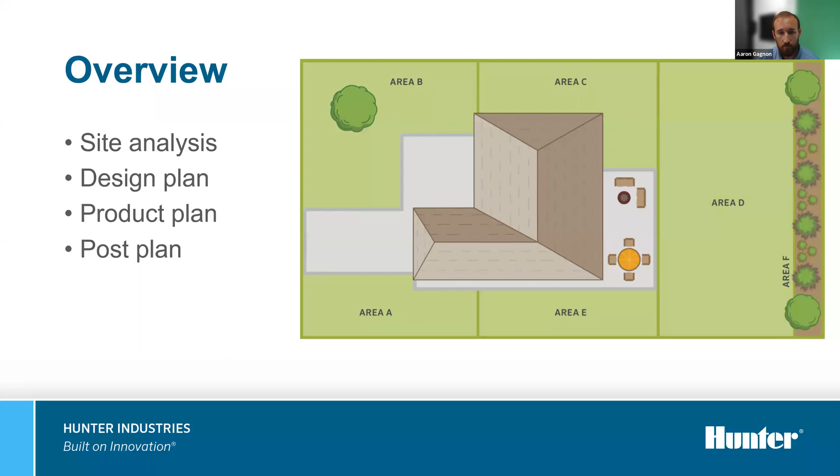When Mrs. Smith was doing some gardening one day, she noticed something peculiar about one of her shrub zones that's on a slope. She noticed a lot of wasted water and realized her sprinklers were more or less irrigating the air than the plants.

Mrs. Smith did what she knew best and called an expert. She called her contractor and asked if they could come to see the site and examine what could be causing this. They got to the site and realized she was right. She does have a problem. She needed a little bit of retrofit work done with some maintenance on her system.

Now, what Mrs. Smith's contractor does next depends on what they know as an expert. After all, not everyone is a black belt, so this can vary. A Band-Aid solution won't fix the problem completely, but an endgame solution will. This is why it always amazed me how two contractors can look at a single problem and produce two different solutions with either a new installation or maintenance fix.

Contractor A, for example, is cheaper up front, produces Band-Aid fixes, installs what they know works, doesn't pay attention to the landscape design like the irrigation system or plant material, and they are more expensive in the long run because the irrigation system requires more maintenance. It's not an efficient system. After all, what do you expect if you had your boss's daughter install your irrigation system?

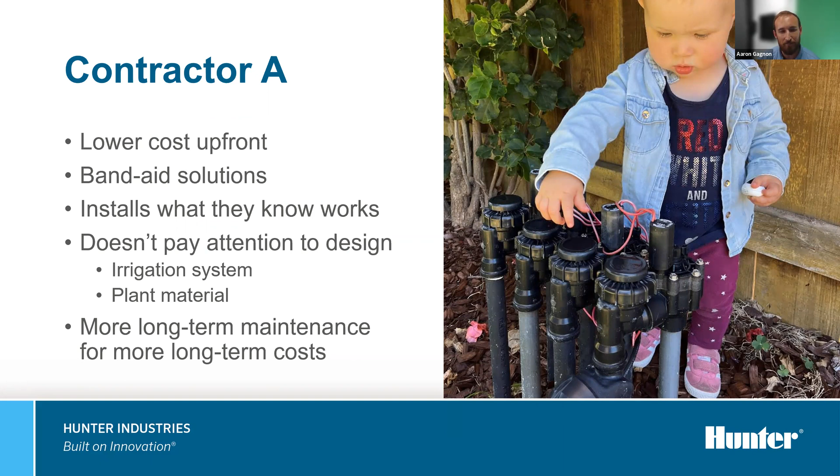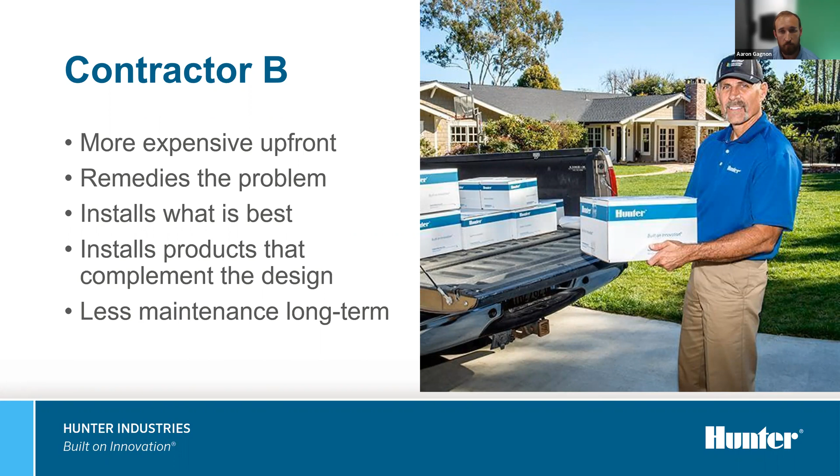Contractor B, on the other hand, is more expensive up front, but they remedy the problem because they install what is best. They install products around the design and are cheaper in the long run because the irrigation system requires less maintenance. This is a black belt's approach to fixing the problem for Mrs. Smith. She chose a more professional solution.

This plan maximizes the efficiency of her irrigation system. In this situation, her contractor helped with all of her runoff and wasteful water by installing multi-stream rotary nozzles, pressure-regulated spray bodies, and programmed cycle and soak for the slope zone. This offers Mrs. Smith an endgame solution with less maintenance at the site. Additionally, her contractor made a larger profit by installing premium products with no added effort.

But what do you do to create an endgame solution? And how do you get there? I'm sure you are all asking yourselves, will it be better for me, my workers, and my clients? To explain these important questions, let's begin with our first point from the summary, site analysis.

Before you can present any solution to your customer, it's important to perform a site analysis so you understand what is happening at the site. Makes sense, right? This gives you helpful information when performing the later points like creating the design and choosing the products for the irrigation system.

And before we get into the information for the site analysis, it's important to have the right tools. An important tool to assist with performing the site analysis is an audit kit. These allow you to perform audits for the irrigation system and receive empirical data and understanding how efficient the system is, what products are being used, and how they are being used.

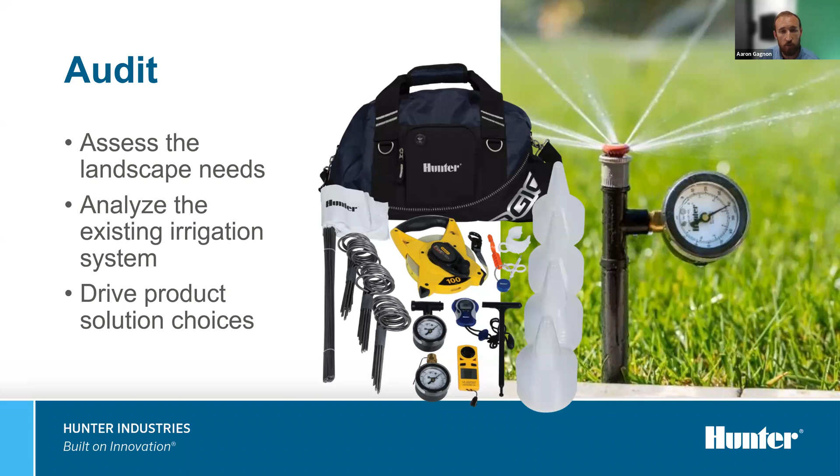Now that you have your audit kit, let's begin with the first item for site analysis, the water supply. Knowing what a customer has for their water supply is crucial for an efficient system. Are they using city water or are they using well water is just scratching the surface. Knowing the capacity of the water supply, like the total GPM and dynamic pressure, is even better. It helps determine how many valves they will need and how many sprinklers they could potentially put on a valve.

A great point to discuss with your client in relation to the water supply is if customers are using well water and if they will need services for maintaining or installing filtration systems for their water supply.

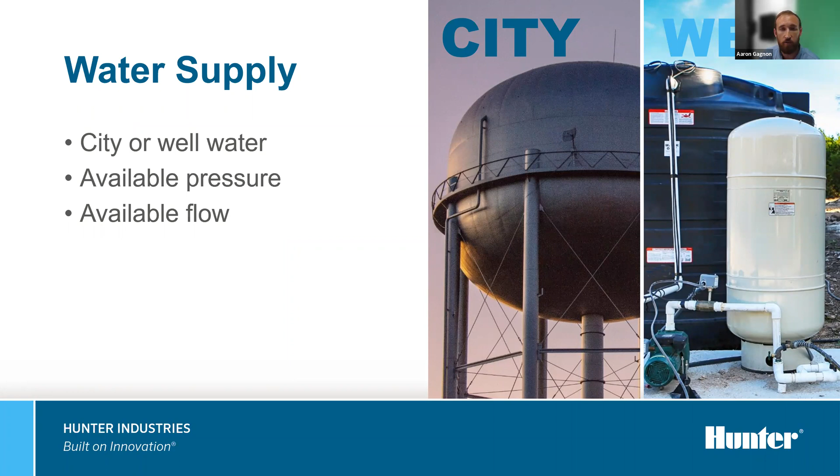Another item to discuss in water supply is usage conflicts. These could be related to specific watering days that are mandated. Having an irrigation system that can be efficient to keep the plant material alive is crucial if water restrictions are in effect in your area.

Even if there aren't restrictions, try to time your irrigation when it's best. For example, pay attention to when it's windier in the day and avoid irrigating during that time. Also avoid times when water is being used in other parts of the property, such as when the dishwasher is running or someone might use the shower, which will consume some of your water supply.

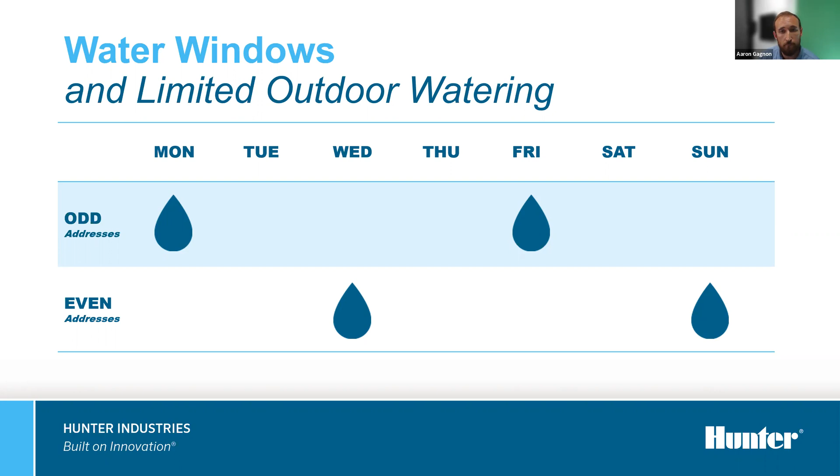Next for your site analysis is plant material. What is Mrs. Smith irrigating? Is it grass, shrubs, or trees? All of these should be irrigated differently. And if these are all paired up with one valve, this presents a great opportunity to offer Mrs. Smith an option for a better solution to her irrigation needs.

Another part of plant material, but kind of on its own, is focal plants. In this situation, Mrs. Smith has a weeping spruce. This item is a priority for her, which offers an opportunity for extra business and to help with her needs. The opportunity will be for an installation of a new valve to isolate this plant's needs and to use premium low volume products to irrigate the focal plant.

Next for our site analysis is how much sunlight and shade the areas of the landscape get. If one valve controls an area where half gets full sunlight and the other half is fully shaded, it presents another opportunity for your business to install a new valve, because Mrs. Smith's landscape is suffering from being overwatered and underwatered, all because of sunlight and shade.

Next for our site analysis is determining what soil the customer has. What soil they have determines how long it will take for the water to be absorbed into the soil, and also how it will absorb. For example, sandy soil percolates water more vertically, while clay is more horizontal. The infiltration rate is different as well - sandy soils flush water through the soil profile much faster than other soil types.

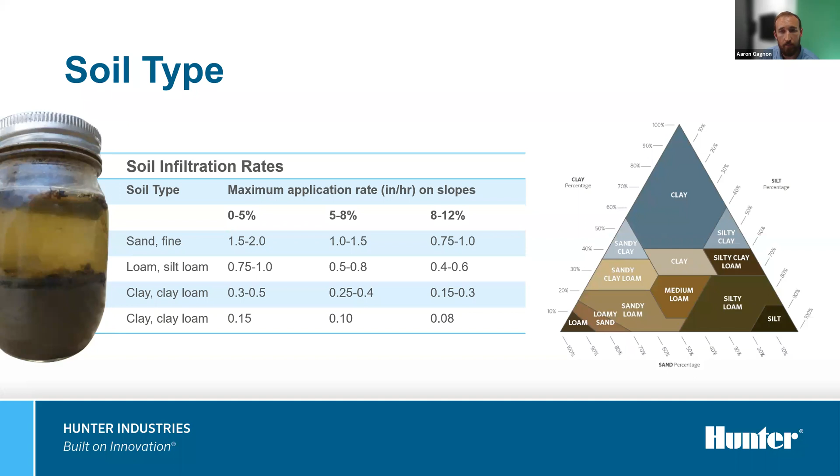After soil, it's important also to consider the geography of the land. Does Mrs. Smith have flat areas to irrigate? No, turns out she doesn't. That changes her end game solution because now we must consider runoff on the slope.

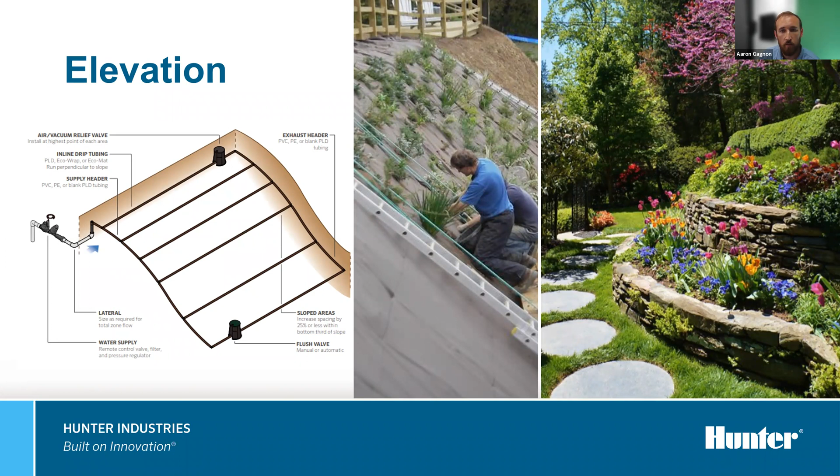The last thing to consider in your site analysis is any other limitations that are not known. These are site-specific landscape qualities that only the customer could know or are difficult to know. Is there anything being missed that the owner is aware of that you aren't? Ask questions - ask Mrs. Smith if something is being missed in the landscape that you should be aware of. Perhaps city sewage lines run through her property. That changes the landscape because in some cities you can't landscape over sewage lines.

After a site analysis is performed, so you understand the landscape elements of the site, planning a design is next. The design plan is an important step to show your customer what the landscape will look like in terms of irrigated areas. You specify all your irrigation zones and how they will be irrigated. It details where things can be improved and where money can be invested to improve the efficiency of the landscape through the irrigation system. If more valves are required in the plan, this will cost more money for the client.

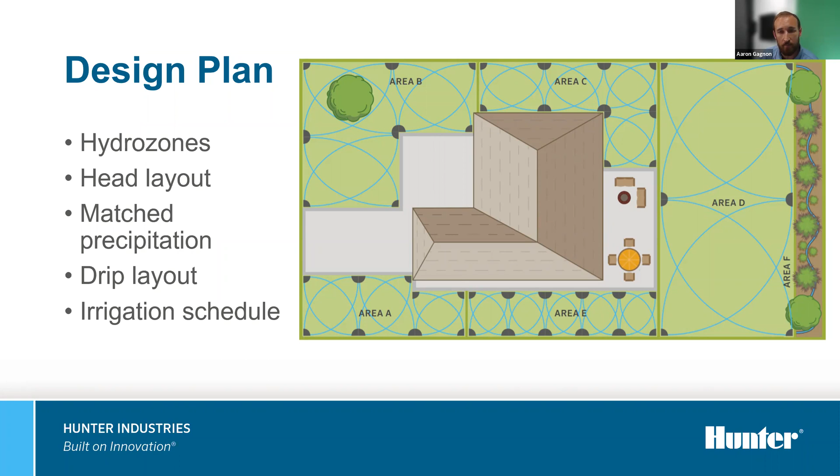To help sell the larger quoted job to a customer, describe to them the challenges they will experience if they don't use an endgame solution to solve their problems. Provide them with the Band-Aid fix and what that looks like. Tell them about the issues they will have if they don't go with the endgame solution. For example: well, Mrs. Smith, if we do not go with this endgame solution, you will end up spending more money in the long run because the Band-Aid plan requires more maintenance. The design plan should also discuss Hydrozones, what they are and why you need them.

This is where the site analysis information will come into play and be very helpful. Let's use an example again. Say Mrs. Smith has 3 valves on her site and is irrigating 7 areas. She's fighting a battle where areas are too wet and too dry and plant material is suffering. She needs 7 valves for the 7 areas to have an efficient system. This is an opportunity to provide her with an efficient system and for you to make a profit with an endgame solution.

First, describe to her why the problem is occurring, and next, the reason for splitting them up. You describe to her hydrozones. The reason why you need to split them up, Mrs. Smith, is that these areas have specific site qualities that make them have different needs. The specific site qualities are plant types, plant water requirements, soil types, sunlight and shade, elevation, and the size of the area. Currently, all 3 valves irrigating the 7 areas have different qualities in a hydrozone, and that is why the plant material is suffering.

For example, for your first valve, half of the area gets full sunlight, and the second half gets full shade. These halves should be separated. If we add more valves to accommodate your hydrozones, the plant material won't suffer, you won't be wasting as much water, and you'll have a much more efficient system with a thriving landscape. Hydrozones give great benefits to having a controlled irrigation system with this added flexibility of additional valves.

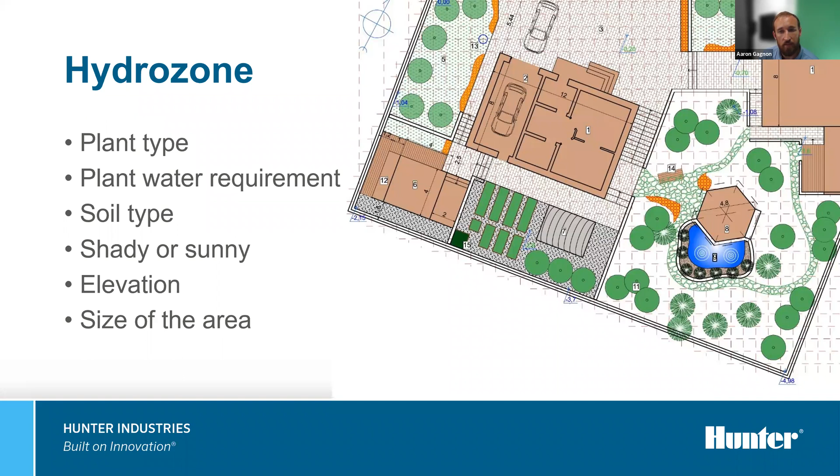Once she agrees, you can then show her in more detail the head spacing for the sprinkler layout. Head spacing is another important part of the design plan to show the customer where issues are located in the irrigation system and how they can be remedied.

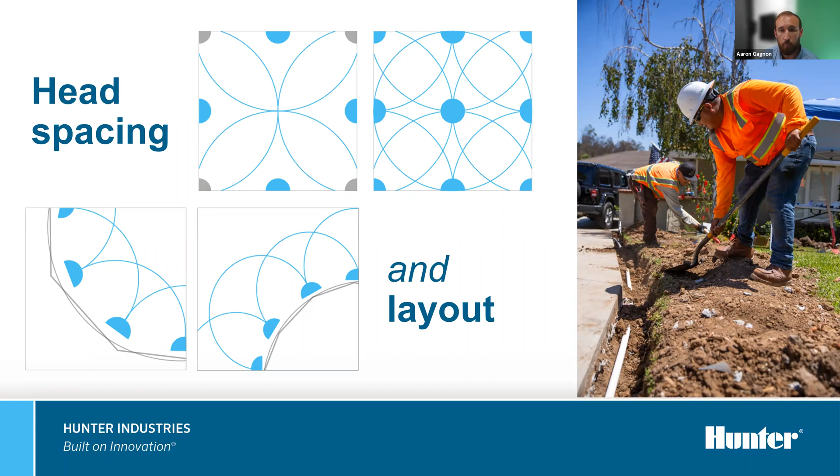For example, part of Mrs. Smith's problem was with the grass zone. In one area, the heads were not spaced evenly, causing over and under watering. Show her that you need to evenly space out the sprinklers to get proper coverage. Adding a different nozzle may not always cure the problem. Installing the heads in proper locations is part of the endgame solution to fix her problem.

The next point to consider is matched precipitation for your design plan. The precipitation rate is the water that is being used in the soil profile. The issue seen in the field is that sprinklers with different precipitation rates are installed with the same valve. Understanding that the water being used in the soil is different from nozzle to nozzle is an important factor in the design.

This is why rotors don't play nicely if the arcs are different on one valve, or if spray nozzles are paired with rotors on one valve. We'll go into more detail about sprinkler choice in the next section, but it's important to understand from a hydraulic point the role that precipitation rates play. It can mean no longer having the hideous muddy soil in your front yard, leading instead to a more aesthetically pleasing landscape.

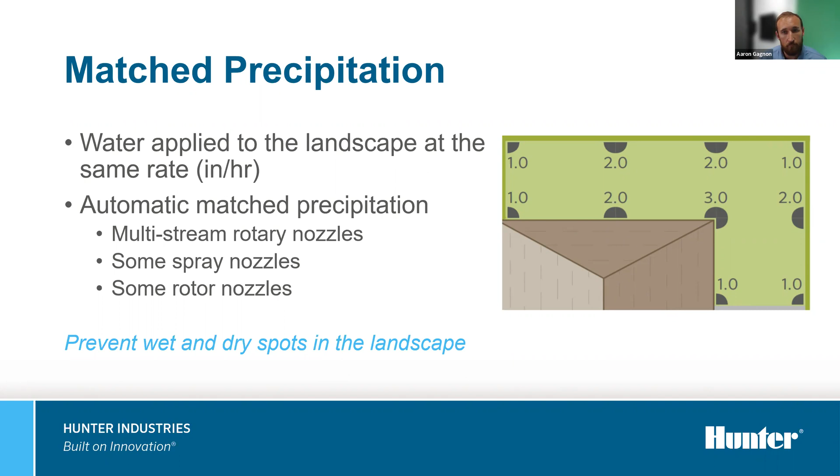Another thing to consider in the design plan is the drip layout. Just like head spacing, knowing where the drip tubing is laid out is important for low volume irrigating. That being said, low volume areas should not be tied to high volume valves. Mrs. Smith once again has an issue with one of the areas because her shrubs are being irrigated by her grass sprinklers.

Those should be on different valves because they have different watering requirements - they are different hydrozones. Describing to Mrs. Smith that installing drip tubing laterally in her garden bed is a much better way to irrigate is a great endgame solution. It provides her with an efficient irrigation system for the shrub's health and allows you to make more profit because you are installing more at the site.

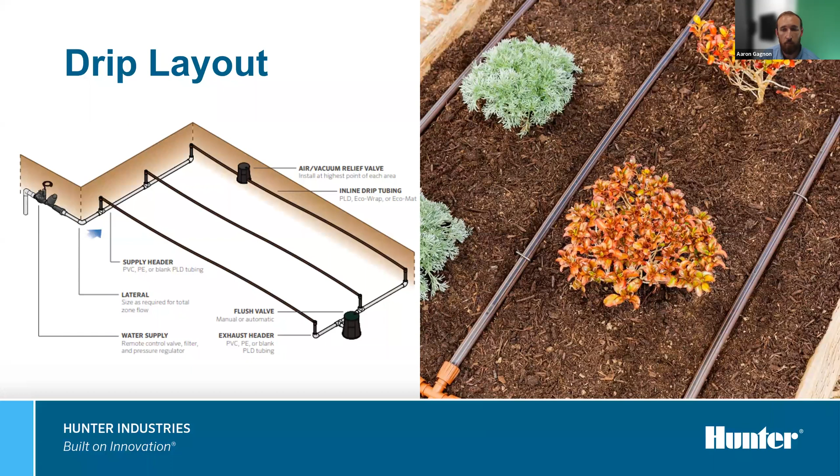The last thing to consider in the design plan is the irrigation schedule. In our story with Mrs. Smith, the cause of the initial call was to help her with wasted water on the slope. Programming a cycle and soak schedule into her controller will help with runoff from occurring in her situation. It gives more time for the water to absorb into the soil profile by reducing the irrigation cycle periods and waiting in between cycles of watering.

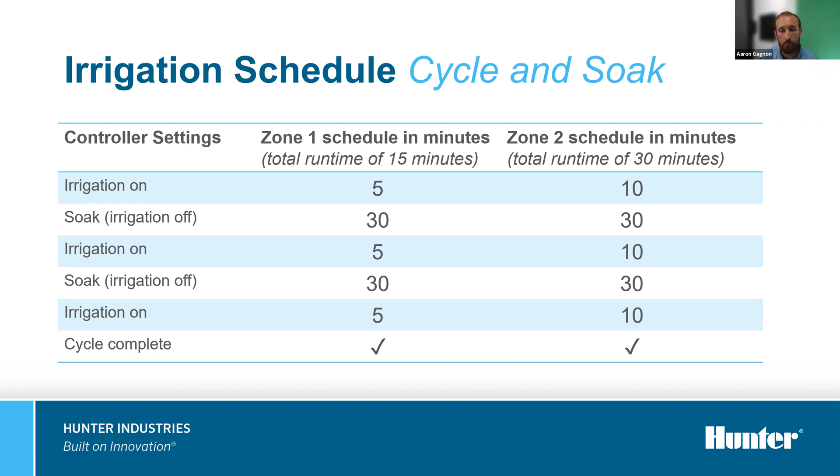After the design plan is finished and the customer understands the rough design for the irrigation system, they will probably want to know at some point what products they will be using. That is when the product plan comes in.

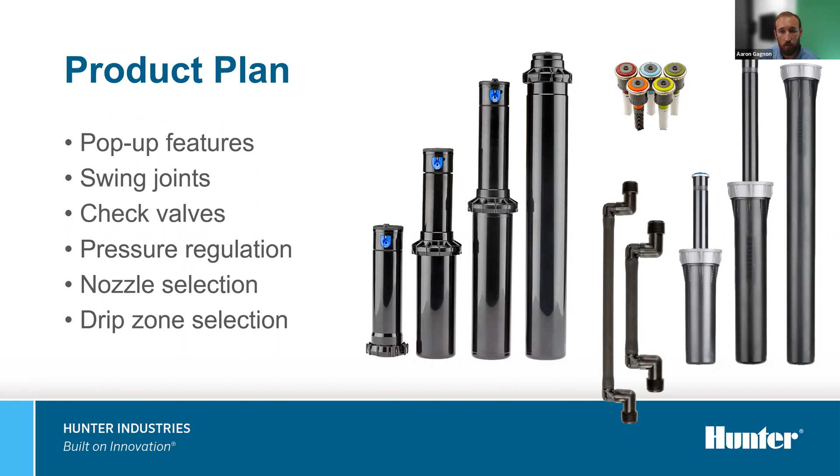The product plan provides a solution to answer why people will use higher end products for an efficient irrigation system. It goes beyond hydrozone areas and gets into detail about providing endgame solutions to specific landscape problems. Not everyone will need to split up areas with valves; others will need better products installed for that endgame solution. This allows the contractor to increase profit by marking up costs, and in many applications it does not require more labor than the Band-Aid fix products.

There are many pop-up height options to consider. The simple way to avoid this is to install sprinklers with a higher pop-up height. Choosing a taller riser allows you to irrigate more efficiently by clearing the plant material.

Let's say you have chosen the right height, but your head is sunken down or crooked. Now you correct it. The most efficient way to do this is to install a head with a swing joint. If you don't have a swing joint, raising the head or straightening the sprinkler becomes more painful. Also, the swing joint helps prevent damage to the sprinkler if it were to get run over.

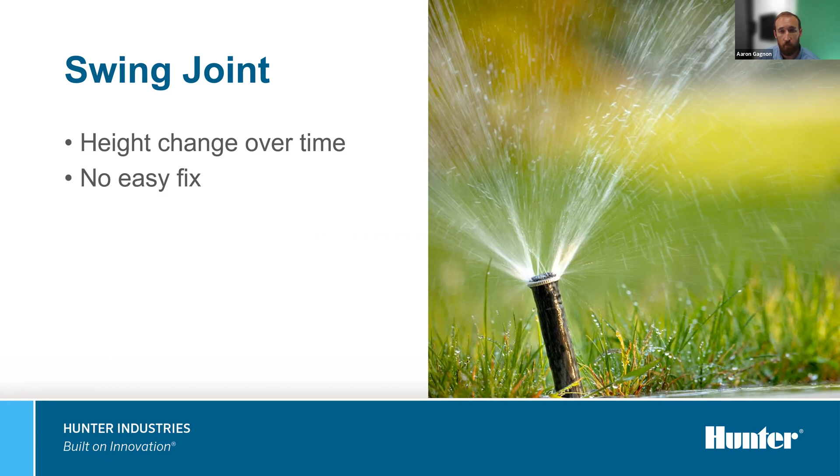If it does need to be raised up, you can dig around the head, lift it up, and straighten it, which is a lot less painful. If you don't have one, you could install riser nipples, but they do not protect the rotor from being run over like a swing joint does - that's a Band-Aid fix. If you're doing a complete install, it's very important to consider installing swing joints for future maintenance calls.

Another option is to use flexible tubing with spiral barb elbows to create your own swing joints. This helps save the installer money in the long run from potential callbacks and needing to repair sprinklers when they are broken, and makes it easier to raise if it is sunken.

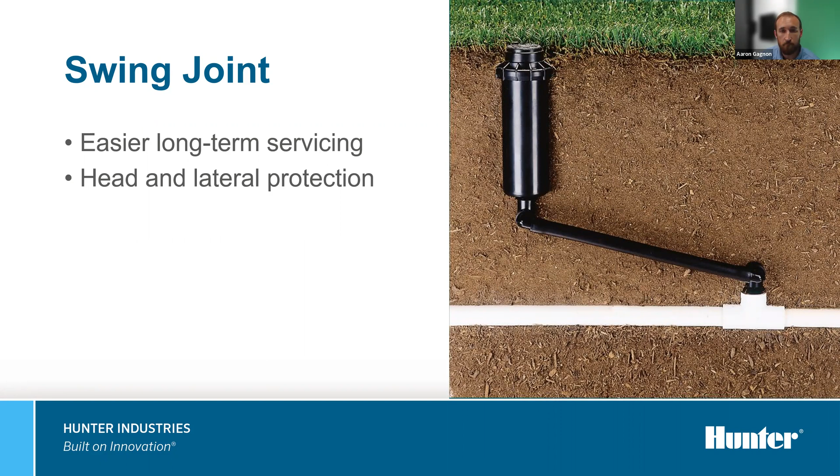Next up with rotors is using a stainless steel riser. This is a great upgrade with a higher end product for applications with large machinery. In installs where large mowers or tractors are used on residential sites, it's best to upgrade to the stainless steel pop-up. They are more rigid and durable and can withstand more wear and tear from these conditions.

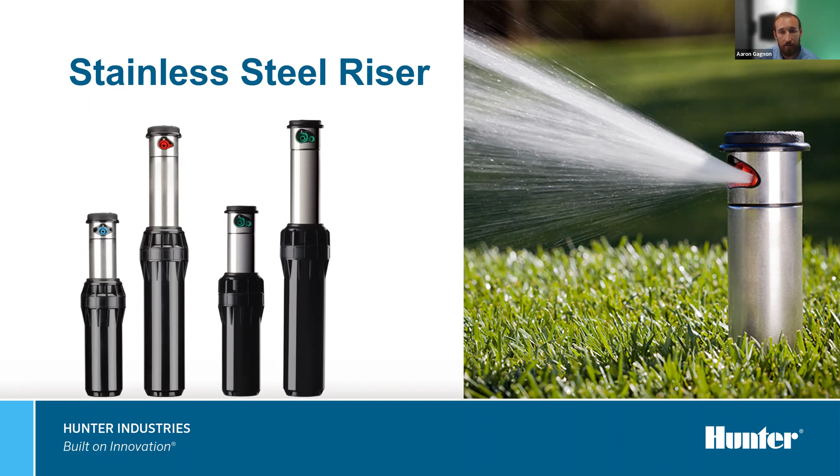Additionally, these were created for harsh soil conditions and help prevent the riser from being scarred by debris. Stainless steel risers are just more reliable to pop up. It can mean avoiding having to go back and install new risers by installing stainless steel in the first place.

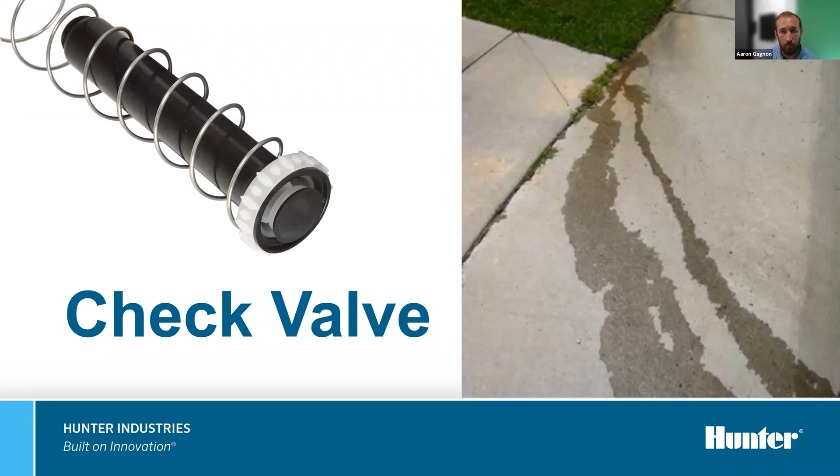Another great product to consider when planning for an efficient irrigation system is check valves. A check valve's purpose is to not allow water to come out of the sprinkler after the valve shuts off. These are used primarily in low elevated spots in the landscape, where residual water in the pipe gravitates to the low spot and comes out of the sprinkler. This can all be avoided with a check valve.

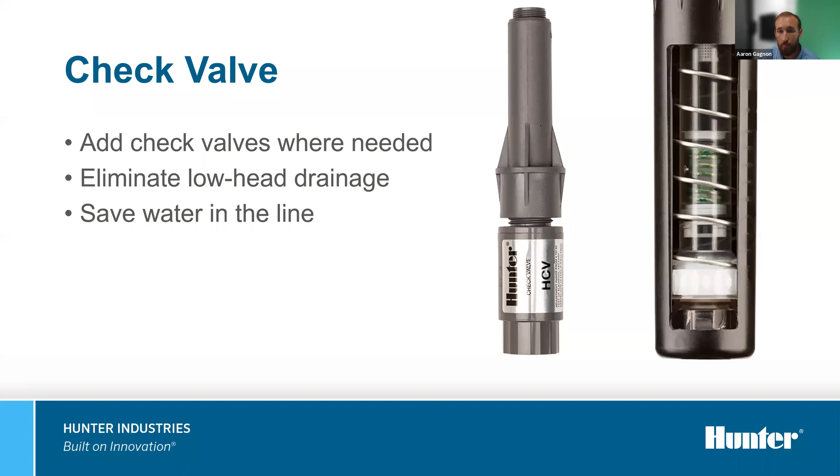What's great about check valves now is that they come as factory installed options, so you don't have to thread a check valve onto the bottom of the sprinkler anymore - there can be one installed in the sprinkler to begin with. Another great option is that instead of keeping inventory of non-check valve products, you can simply keep check valve products in inventory to increase the space on your shelves. Check valves provide a great solution to a problem that doesn't cost you any more time and labor, and can help make you more money with this upsell.

Next are pressure regulating sprinklers. Regulating pressure at the sprinkler head allows each nozzle to see the same optimal pressure for balanced performance, higher uniformity, minimal misting, and lower flow rates. When switching to pressure regulated spray bodies, you can have the potential of saving up to 30% in water savings. This is all from using the same size sprinkler, but using a pressure regulated form of it.

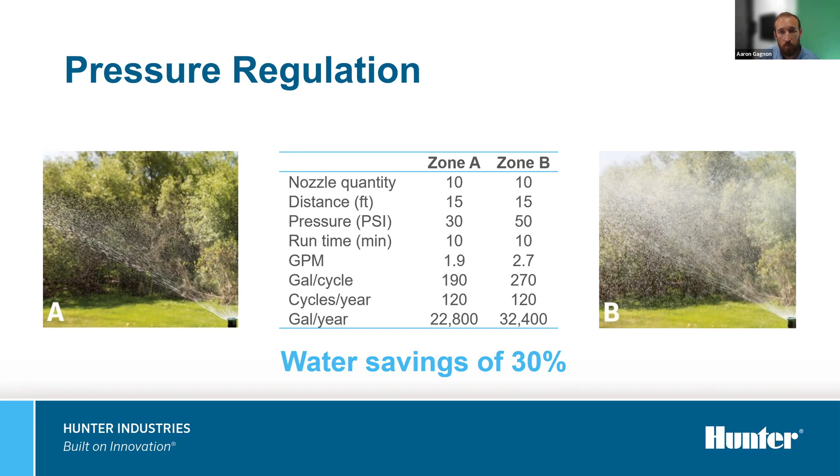Before the client may say no to this, it is also important to mention that it may be mandated in your area. Many states have started this. For a full list of the states requiring this, visit the Appliance Standards Awareness Project website. The ASAP estimates that if every state adopted the WaterSense specification for lawn sprinklers as a standard by 2025, the US would save 141 billion gallons of water annually.

Pressure regulated sprinklers are a fantastic way to save water and create a more efficient system while using the same amount of labor time and increasing your profits.

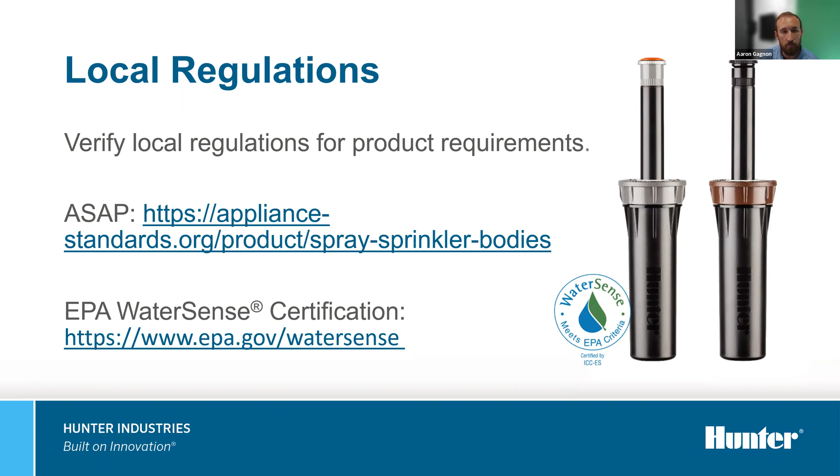Selecting which nozzle to use is very important during the product planning process as well. Many are designed for specific plants, soil types, and site needs. Choosing the correct one means getting the last part of the sprinkler to deliver the efficiency of the system for your client's landscape.

Let's consider rotor nozzles first. Under normal conditions, standard nozzles for rotors are a terrific choice for most applications. They can cover areas larger than spray or multi-stream rotary nozzles, and provide an amazing way to save cost on labor for installation by minimizing the number of heads for the large area.

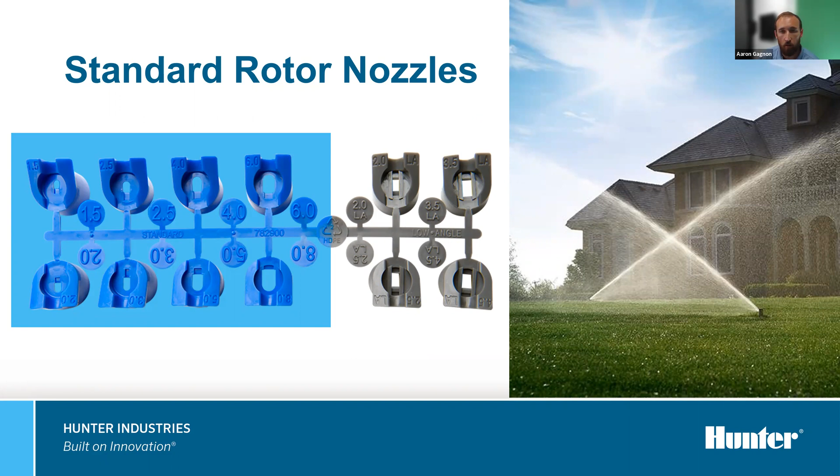On the other hand, if a residential site requires to be irrigated with rotors on slopes, low-angle nozzles are a great solution. These offer a great choice for delivering water to sloped landscapes.

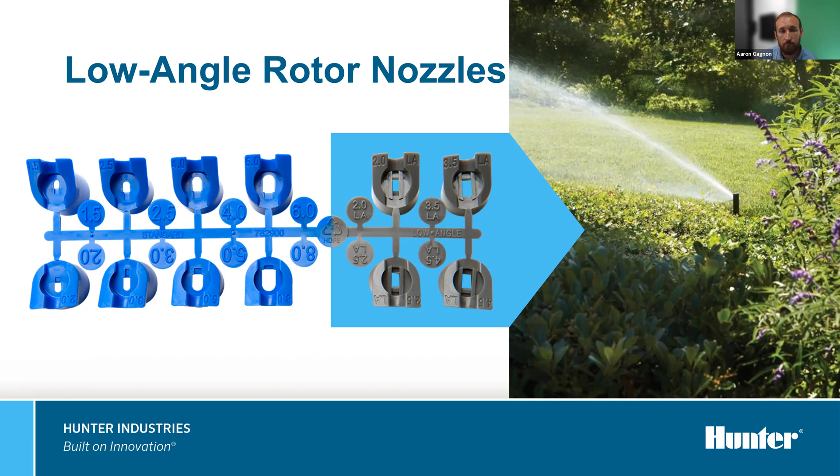Next, we have spray nozzles. These are a great choice for applications with a pressure of around 30 psi. When at that pressure, they can deliver large droplets and do an outstanding job at applying water to the landscape.

If you want to upsell, though, from spray nozzles, the multi-stream rotary nozzles would be a great choice. This premium product delivers water most efficiently with its lower precipitation rate, which eliminates runoff, has a high distribution uniformity, and has a larger water droplet size. The multiple streams allow the water to be delivered more uniformly and have a matched precipitation. Installers can choose different radius options from spray distances to short rotor distances, all in the same valve. This gives them great flexibility when installing.

And not to mention, Mrs. Smith loves having her grandchildren over. And one of the things they love to do together is sit back in the morning and watch the pretty streams of water flowing through the landscape.

Next, we have short radius nozzles. Short radius nozzles qualify as microsprays for pop-ups since they flow under 30 gallons an hour at 30 psi across the family of nozzles. This probably only affects those regions pushing microproducts in small spaces, but these are really great low flow spray nozzles for small areas and planters.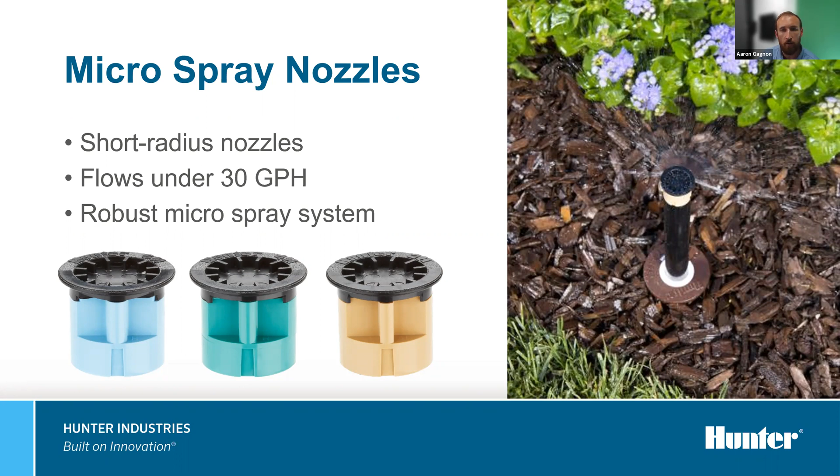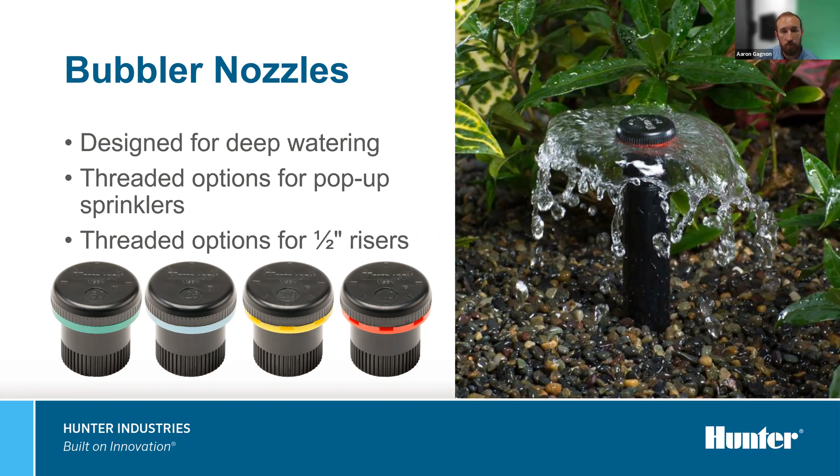The last item to cover in product planning is drip zone valves. Product planning for these items presents great opportunities for increasing profitability and efficiency. When planning for micro irrigation systems, it's important to have appropriate filtration and pressure. Drip zone valves have filtration and pressure regulation in one for the convenience of installation. Whenever a low volume of water is needed on site, consider using drip zone valves to upsell from a normal valve.

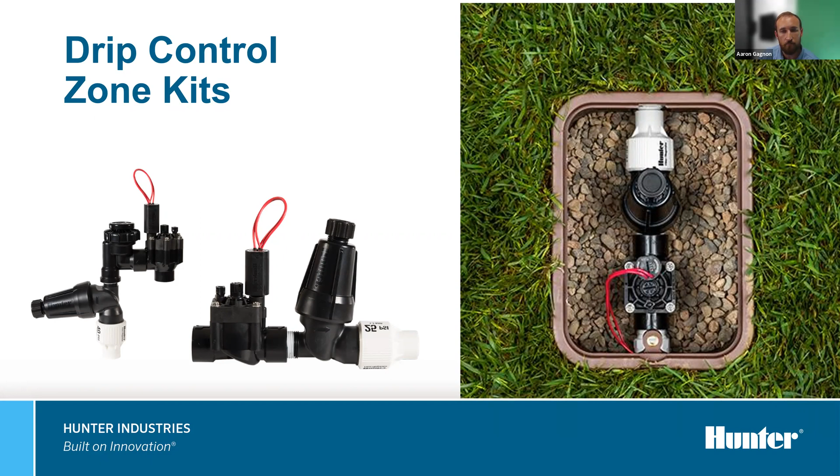After the plans are implemented and the renovation or maintenance project is finished, what else can be done? Mrs. Smith, I'm sure, loved having you as a dependable contractor, but I am sure she would appreciate your business long-term. Your post-plan contributes to that.

The first thing to consider in post-planning is advertisements. Installers can't keep a sign in someone's yard for the entire time they are renovating the landscape or performing maintenance. They can put company stickers on their irrigation controller, which provides a great way for homeowners to contact installers.

It can be a cumbersome process at times to keep track of paperwork and contact details for installations and renovations. A company sticker on a controller is a much easier way to know who installed the system and how to get a hold of the installer. What's great also is that in many applications, when a homeowner needs to talk to the contractor, they need to be on site, and that is exactly where the sticker is.

The homeowner can be ready for any questions the contractor might have for the customer additionally. But what is best is that it is a cheap advertisement for future opportunities. If a homeowner sells a house and the new owner does not like the design of the landscape, either they want more grass or less grass, an irrigation design will be needed, and they have contact info for who to call.